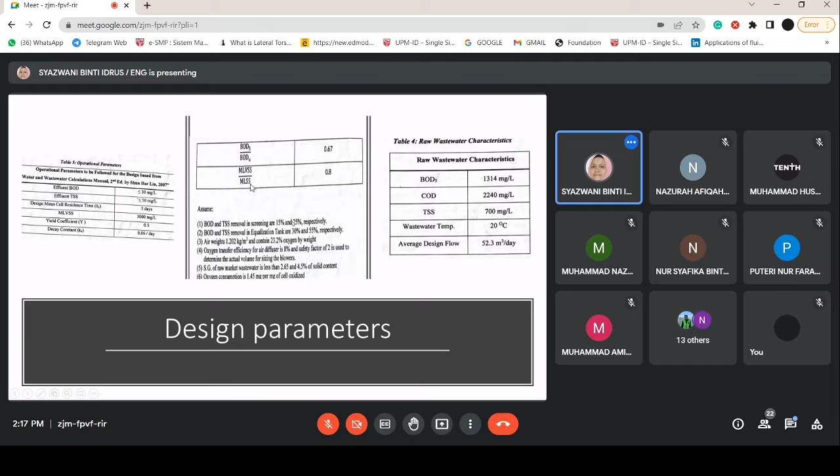Next, in the equalization tank, which is the primary process, we have to moderate or normalize the flow rate based on the cycle.

Since we are designing a wastewater treatment plant for a wet market, this wet market is only operated for 18 hours - it's not like a conventional wastewater treatment system working for 24 hours. If it were 24 hours, you would have the same average flow rate.

In this case, we have to normalize because the operating period is only 18 hours. So these are the actual average hourly flow rates. Since the MBR, the membrane bioreactor, treatment operation takes 12 hours, you take the average hourly flow rate times 12 hours, and you will get the volume of wastewater to be treated.

From the volume of the wastewater to be treated, you can calculate the sizing for the equalization tank. Take the depth equal to 3 meters, the freeboard equal to 0.6 meters. Volume equals length times width times depth. Given that the ratio of length to width is 3 to 1, so L is equal to 3W, times W, times 3. The depth is equal to 3 meters.

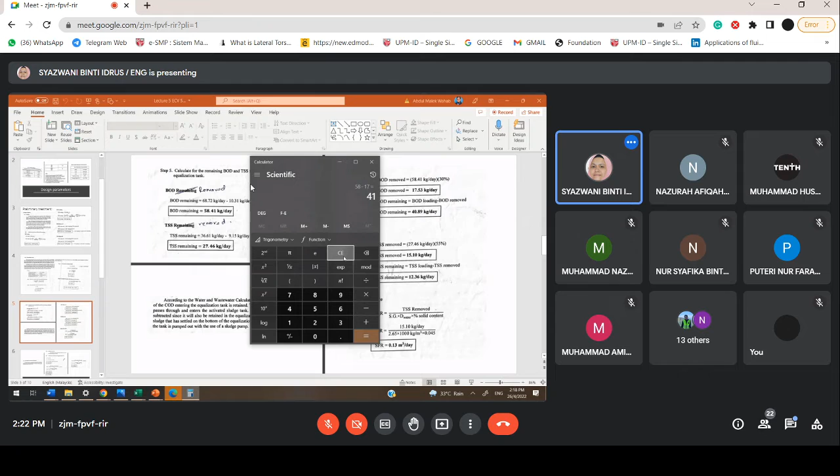So how do you get BOD remaining? 58.41 minus 17.53, so that you get BOD remaining. These are the BOD to be treated during the secondary treatment, because we calculated earlier the amount of BOD to be removed during the primary process. So BOD loading, which is the BOD remaining from the preliminary process, minus the BOD removed during the primary process, gives BOD remaining to be treated in the secondary tank.

The same steps happen for the TSS. Then you can also calculate the sludge flow rate. Normally the value is extremely small, but you consider sludge flow rate equal to TSS removed over specific gravity of the particles. Normally we use the specific gravity of sand, which is 2.65, times 1000, the density of water, times solid content. Solid content was given earlier, so you get SFR equal to 0.13 meter cube per day.

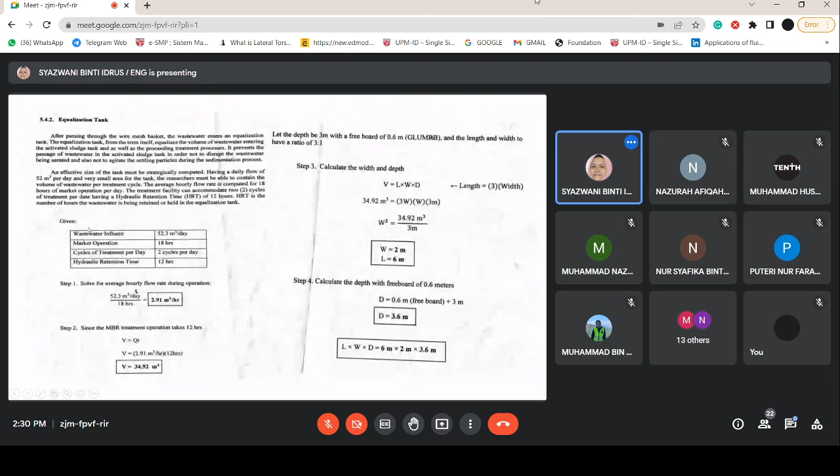So 1 plus KD, 0.006 per day is the KD, given earlier - here, the decay constant. Then theta C, the sludge age, 5 days, is also given. But this is a mistake - it is actually 0.06, not 0.006. But the answer here is correct.

Once you have calculated Y obs, then you can calculate PX. PX is important because later we need to calculate PY. What is PX? I have an extra note here. PX is equal to mass in MLVSS, and PY is the mass of MLSS. Given earlier that the ratio of VSS over SS is equal to 0.8. So to calculate PX, you solve for this equation, and these are the equations to be used. Then you can calculate the oxygen requirement.

The oxygen requirement. Then calculate for the sludge wasting. Sludge wasting - theta C is given in the earlier section as 5 days. You need to find the value of QSW.

The QSW, this equation - if you notice here, 50 milligram per liter times 0.8, where do I get this value? 50 milligram per liter is from the TSS concentration given in the earlier section of the slide, times 0.8. Where do I get 0.8?

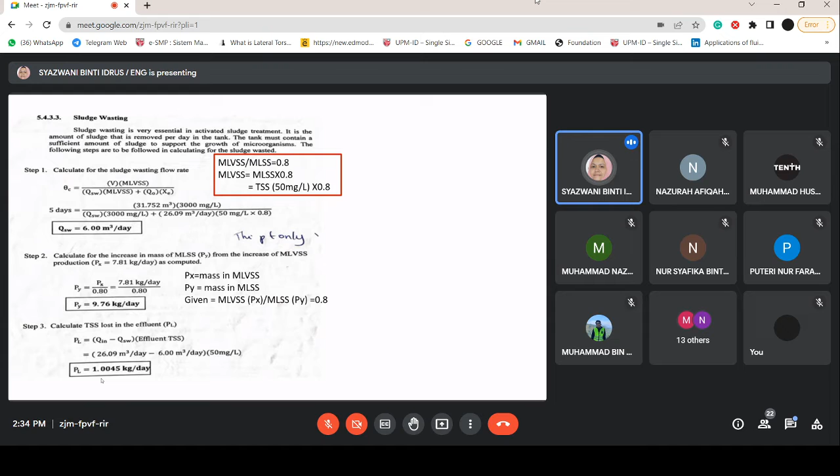If you have a look here, we consider the total Q in, minus the QSW. So these show the importance of calculating the QSW, this is the sludge wasting flow rate. Q in is the actual flow, minus the sludge wasting flow rate, then times with the target concentration of the total suspended solid. So you will get the PL, which is the TSS loss in the effluent. Meaning this will be the concentration of your TSS in the treated wastewater.

The final section is on the membrane bioreactor facilities. These are a ready-made membrane system. We are not yet in the topic of membranes, but this is a small introduction, a simple introduction on a complete membrane system. You can see the design flow is between 10 to 20 liter per hour per meter squared. These are the recommended flow and filtered area.

The pore size is about 0.1 micrometer. The porosity is more than 80%. Considering these are the specs of the membrane, in this case they use the hollow fiber membrane.

Remember, I did mention to you 3 weeks ago, there are many types of membrane, classified based on the pore size. So hollow fiber membrane, flat sheet, or tubular membrane, these are only the configuration, how they arrange the membrane. But the membrane is classified based on their pore size.

For this reason, nanofiltration can also exist as a hollow fiber. Ultrafiltration can also exist as a hollow fiber. Microfiltration can also exist as hollow fiber membrane, because different pore sizes can also be arranged based on the type of membrane. So we do have hollow fiber, flat sheet, as well as tubular membrane, these are the most popular membrane configurations.

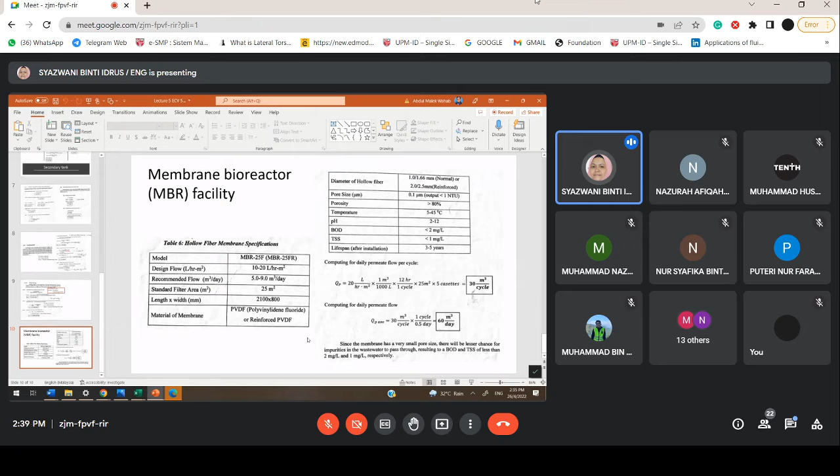Oxygen requirement is no longer part of your syllabus because it has been covered during the 3rd year of study, but you can go through it for revision purposes. Just to be honest with you, it will not come out again in your test or final exam. This topic, oxygen requirement, as well as slide number 8 and slide number 9, will not come out again in your test or final exam because it's no longer part of your syllabus. So the rest of the slides are still covered as part of the syllabus in this course.

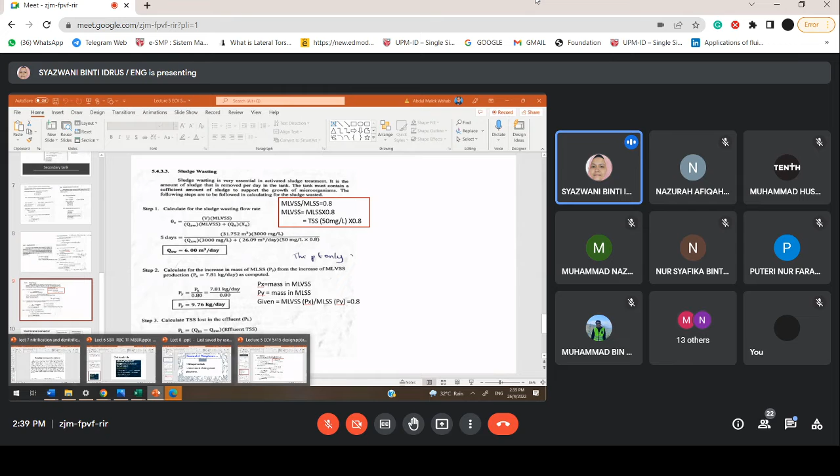All right, next slide is on... no, the sequencing batch reactor. Alright, before we start with the sequencing batch reactor, today we are going to cover four systems: sequencing batch reactor, trickling filters, RBC, and moving bed bioreactor.

Just to recap, we are exploring the aerobic system, of which there are two types: attached growth system or biofilm, and suspended growth. For attached growth, the rule is very easy - as long as you have the filter media, as long as you have the support carrier for the microbes to grow, that is known as the attached growth system. But if you employ a tank or a pond without any support media, with only sludge in the tank, then it is known as suspended growth.

So today we have covered up to the activated sludge process. Now I'm going to complete the sequencing batch reactor, then we shall explore the attached growth system.

Okay, before we go further... oh dear, looks like I have to reopen the slide again.

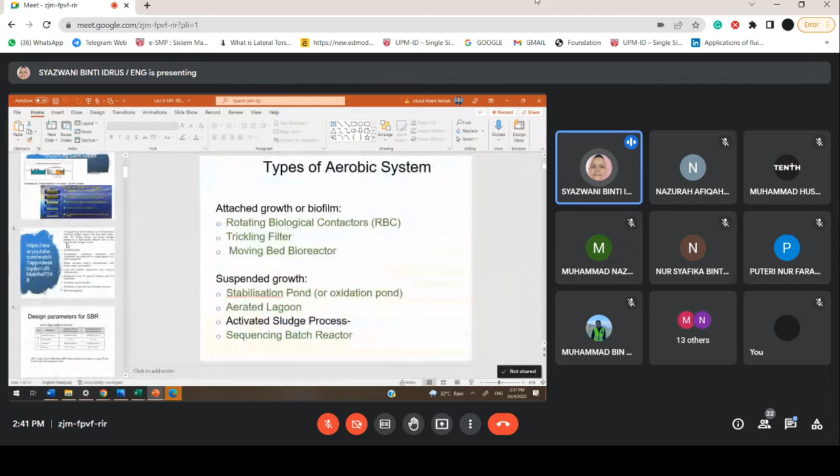Alright, before we go further, I would like to give a very short description on sequencing batch reactor that will be followed by a video. So sequencing batch reactor is a system where we only need one tank to complete the entire process. In other words, sequencing batch reactor has been designed as an improved version of the activated sludge system.

Activated sludge system is a system that requires a larger area, because we need a primary system, an aeration tank, a clarifier, and sludge treatment. So by employing sequencing batch reactor, we can minimize the area required, as well as minimize the sludge production. This system also helps improve or remove the nitrogen as well as phosphorus content.

So it comprises of, definitely, whenever we have a wastewater treatment system, we need a screening process - that is a physical process to remove the larger debris. This will be followed by the equalization tank, the function of which is to control the volume of water into the major tank. So in this tank there will be four processes that occur.

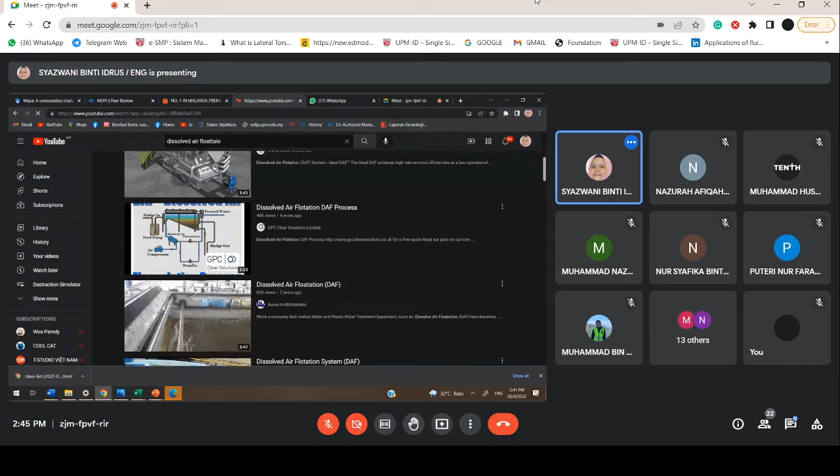Okay, let's watch a video. There is no voice for this video, but you can always read.

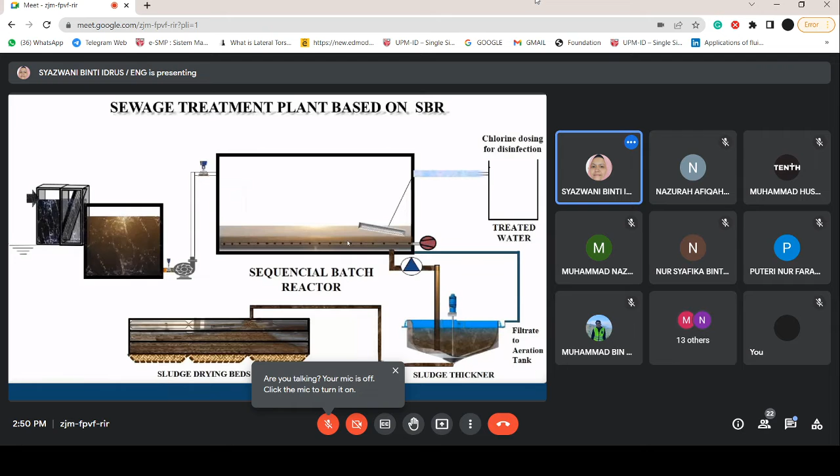Okay, that's one. Next, these are the advantages of having this system. This system is basically a simple process: fill, react, settle, and draw. It comprises equalization, biological treatment, and clarification is achieved - all these processes can be achieved within a single reactor.

We can have better aeration control. We can treat or remove nitrogen - denitrification, the nitrogen removal, and lower power consumption too. Denitrification is the process that occurs in any water bodies for nitrogen removal. After the semester break, we will go through these topics on denitrification as well as nitrification process.

Biological nitrogen and phosphorus removal without need for chemicals - so these systems are good for N and P removal. It's simple in terms of operation, and minimal footprints. These are the major advantages as compared to the conventional activated sludge system.

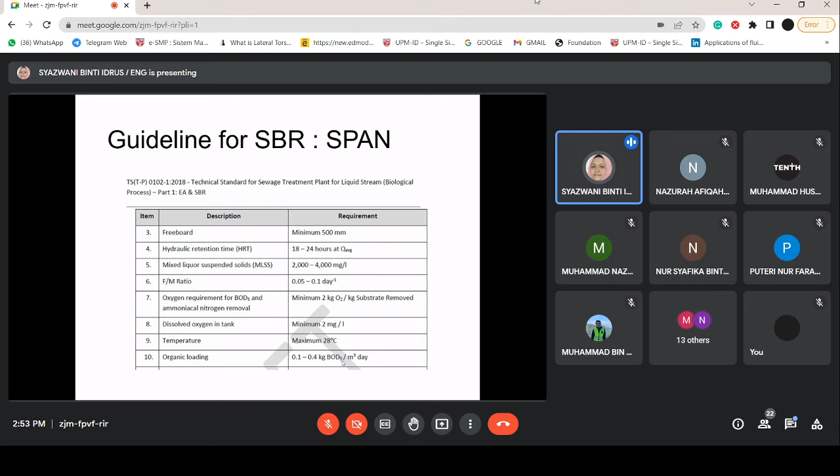Okay, next we continue with the RBC - this is the rotating biological contactor. Maybe we can go for the calculation of OLR first. What is OLR?

By definition, OLR is the organic loading rate - the weight of the waste given to a certain volume of the tank or reactor. The organic loading is the amount of COD or BOD applied to the filter or reactor per volume of filter media or reactor per day. The unit is expressed as BOD gram, not gram per liter - it has to be gram. The weight of the BOD, the weight of the COD per meter cube, where meter cube is the size or volume of the reactor, and per day.

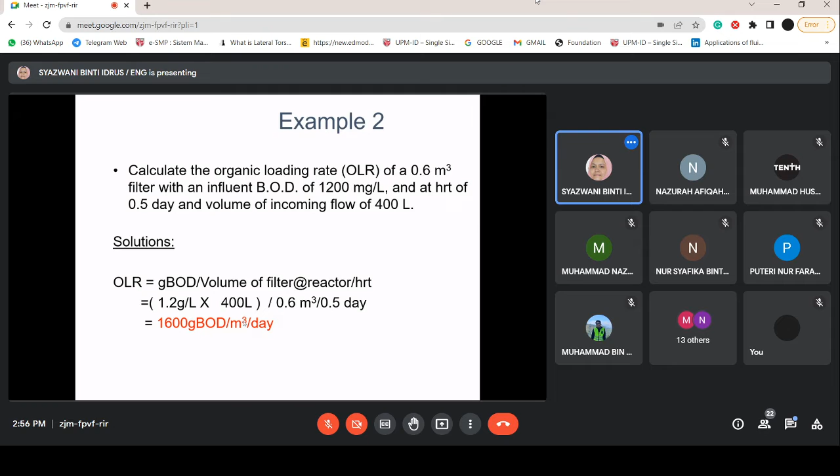Meaning to say that every meter cube of the reactor, you give them about 1600 gram of the BOD. So this is how we define the organic loading rate.

Okay, let's go for a very short introduction on the rotating biological contactors. In the previous year, you have studied the theoretical aspects of the RBC, but you did not conduct any design calculation. You did calculate for the area required, but there is no detailed calculation on the stages as well as the train for the RBC. So a very short description: the RBC is a fixed film biological secondary treatment device.

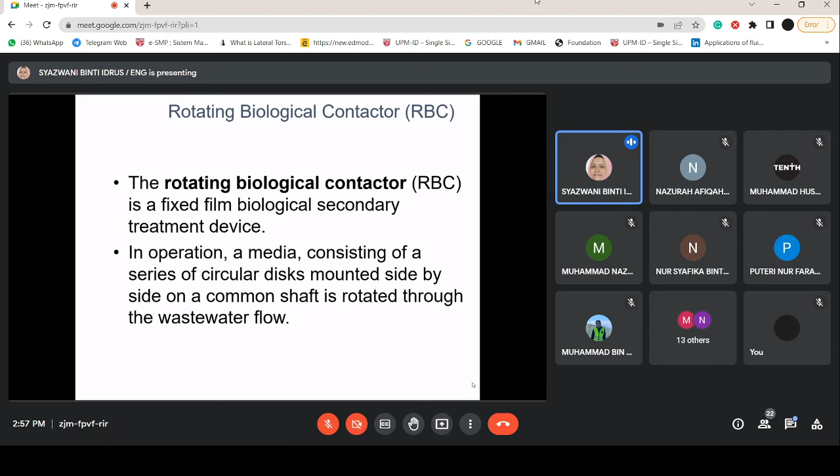The concept of RBC is a rotating drum with a filter media so that microbes can stay within the media. It will rotate to get in contact with the wastewater.

Okay, so let's watch this. This is a very short video. What is RBC?

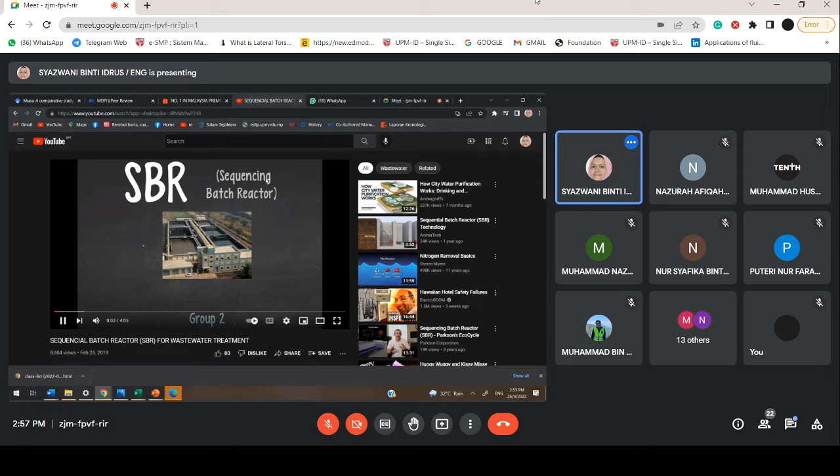Sorry. Why is it still on? One second, let me copy this. Okay. They're getting excited knowing that we are coming. They're running here, look at that.

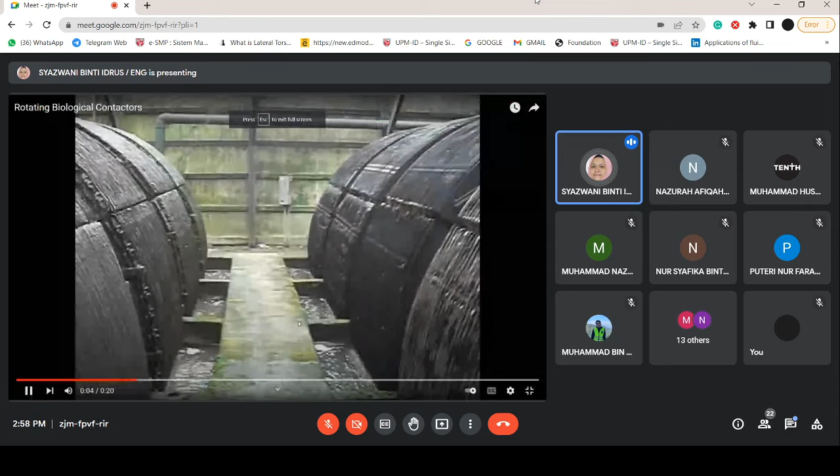Okay, so these are the RBC, rotating biological contactors. Okay, these are the drum. Within this media are microbes, microorganisms which have been cultured. At the bottom part of the system are the wastewater to be treated.

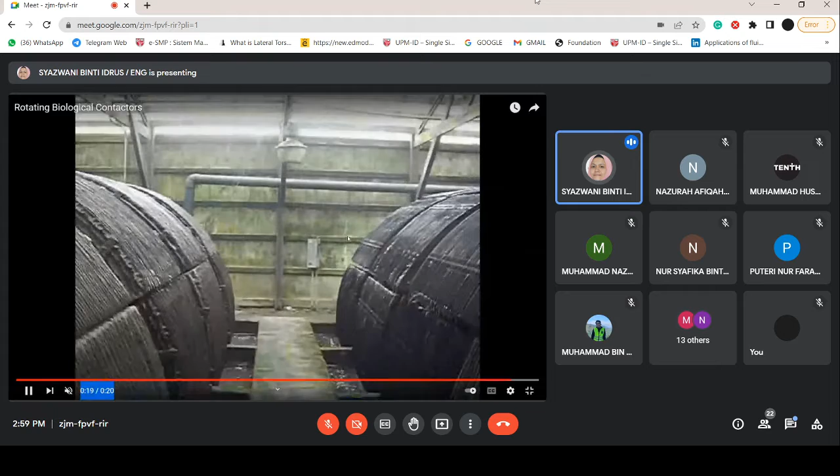Very short video, these are the wastewater to be treated. So the RBC will be rotating, so that it can get in contact with the wastewater and treat it. Where is actually the microbes? Microbe is here, staying within the filter media. So the concept of RBC is the filter media will rotate so that it can get in contact with the wastewater at the bottom part of the tank.

Okay, so this system again is an aerobic system because it's an open system where we allow the oxygen to get in contact with the microorganism. Yeah, this is still an aerobic system. Okay, so let's continue.

Okay, normally when we employ RBC, the shaft continually rotates at 1 to 2 RPM, very slow, and a layer of biological growth 2 to 4 mm thick is soon established. Once you keep rotating the drum, it will get in contact - the microbes will get in contact within the filter media, continuously biodegrading the waste, and after a certain period it will develop a layer of slime on the filter media.

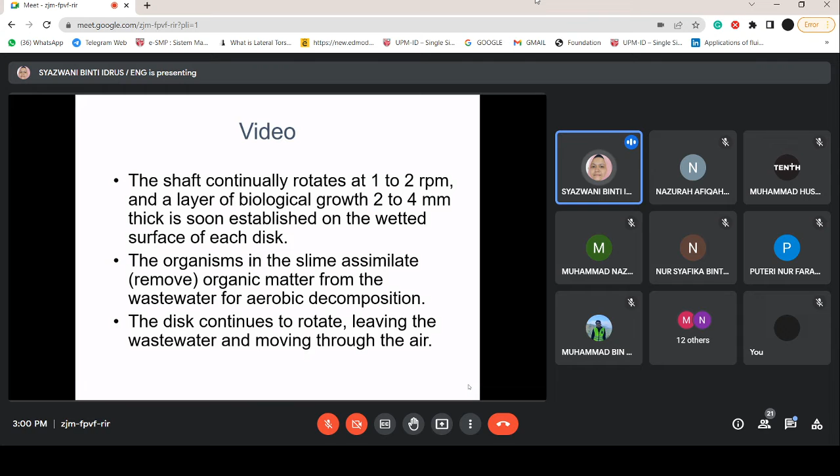And this slime is extremely important because when the slime exists, it indicates the process occurs. It shows the performance of the process. After a certain period, the slime will get thickened, so it will be removed from the filter media. Sometimes it requires manual cleaning. But the slime is very important - it has to exist, otherwise no biological process occurs.

Later I will share with you how the colors of the slime tell us the process performance of the system. So these are the schematic diagram on the RBC. Basically, we still need the primary tank, but there will be a series of drums here, and these are the secondary tank. Typically a single contactor is not sufficient.

Typically a single contactor definitely is not sufficient. We will need at least three stages or three trains to complete the entire process, because this is where we keep recycling the...

My son is also doing his reading. Okay, all right.

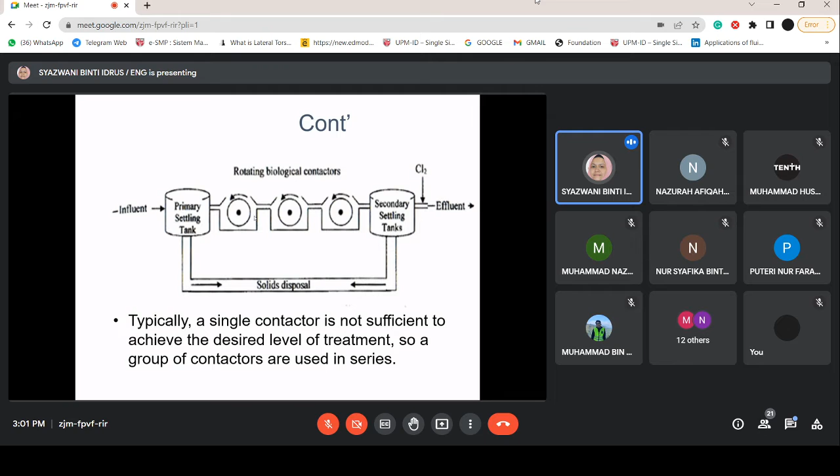Typically it requires a series of drums, so that the wastewater can get better contact with the microorganism. Each individual contactor is called a stage, and the group is known as a train. Later, when we do the calculation, I will share with you what is the train and what is the stage. So most of the RBC consists of two or more trains and at least three or more stages.

Yes, at least there will be two in a row or two in a column, but most of the time in the design, we put three in a row and three in a column. So this is what it means by stages and trains, as I mentioned just now.

Different colors of the slime indicate different process performance of the RBC. If you have a gray, shaggy slime growth, that indicates normal operation. However, if you see reddish brown, golden shaggy growth of the slime, that indicates a heavy, serious problem of nitrification, which means higher nitrogen content in the wastewater being treated, or we have to supply more oxygen in this case.

When we have high concentration of nitrogen in the raw wastewater to be treated, sometimes we have to supply more oxygen, because to treat carbonaceous BOD requires only one group of oxygen, but to treat nitrogenous BOD requires four times the oxygen. So if the reddish brown or golden shaggy growth appears, that indicates higher nitrification process and higher nitrogen content. It tells us that the oxygen is not sufficient for the microbes to biodegrade the waste, due to the high concentration of nitrogen.

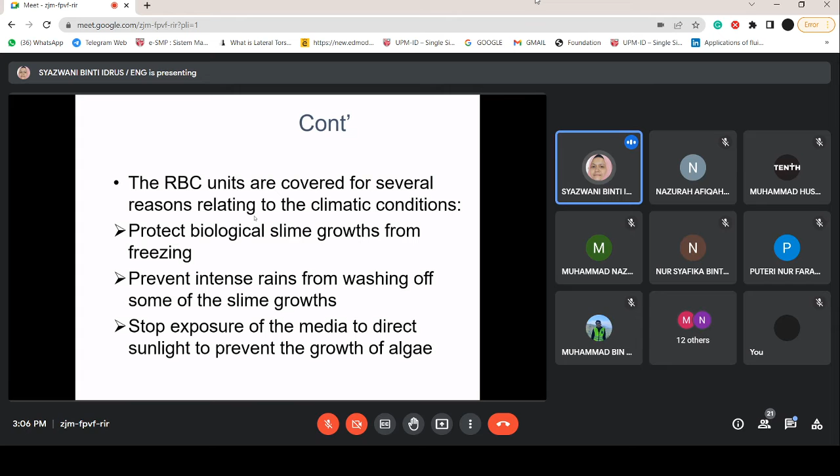Second, we have to protect the RBC unit, the drum, from heavy rain. Third, to protect from direct sunlight, because direct sunlight can cause the growth of algae. Next, to avoid exposure of the media to sunlight, because the media itself can turn brittle, become hard.

So that's why we'd like to avoid direct sunlight and provide protection for the operators - that's why it's better for RBC units to be covered. Now, in regard to typical performance, normally when we employ RBC, we can remove BOD up to 80 to 95%, as well as solids at 85 to 95%. This process is also good for the removal of organic nitrogen as well as ammonia nitrogen.

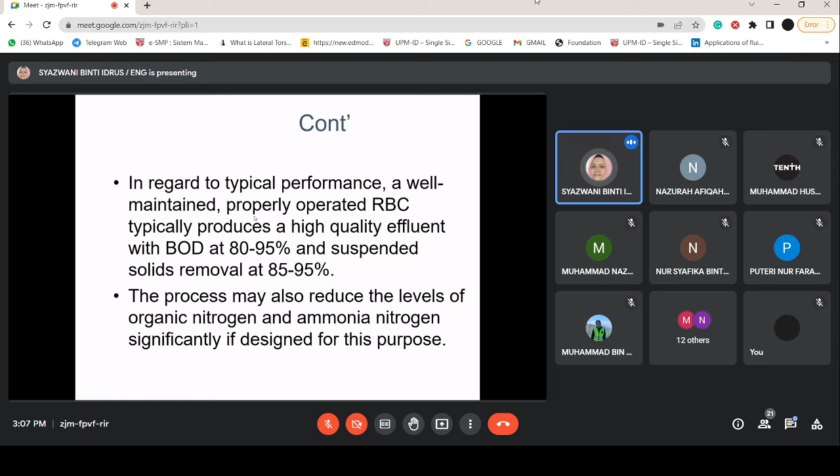If we talk about the sequencing batch reactor we studied earlier, it's good for removal of nitrogen and phosphorus, while RBC is good for nitrogen as well as ammonia nitrogen. Phosphorus - not so many biological systems can remove phosphorus effectively, unless you combine anoxic condition, oxic condition, and anaerobic condition. If you employ only one simple treatment method like this, which is aerobic, it's not easy to simply remove the phosphorus.

That's why in some cases chemicals will be added. What we studied before - they add what? They add ferric chloride for the removal of phosphorus. Then, advantages offered by the RBC: the first one is short contact period.

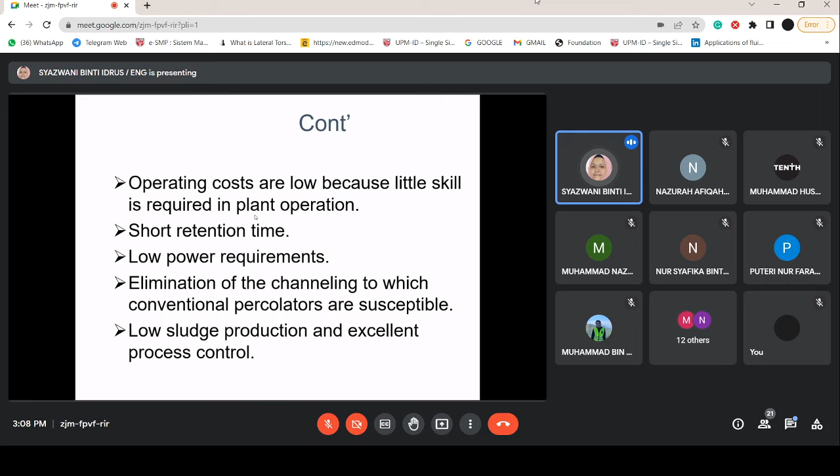RBC are capable of handling a wide range of flows, and sloughed biomass generally has good settling characteristics. Operating costs are fairly low, because little skill is required, short retention time, low power requirement, and low sludge production. So these are the major advantages as compared to the conventional activated sludge system.

The disadvantages of the RBC are the requirement for covering the unit in northern climates to avoid freezing, and shaft bearing and mechanical drive issues, because it requires rotating equipment. That's why we have to monitor to avoid any mechanical problems, so it requires frequent maintenance.

Okay, next is on trickling filters. What is the difference between RBC and the trickling filters?

Both of these systems are attached growth systems, where the principle is employing a filter media, and microbes will stay within the filter media. But the major difference between RBC and trickling filters is that in RBC, the rotating disc will rotate so that it can get in contact with the wastewater at the bottom part of the system. However, in trickling filters, there is a rotating arm which keeps moving so that it will splash the wastewater onto the filter media. So in this case, the wastewater is moving onto the filter media.

Employing this system, normally trickling filters only use one set of system. It's not like RBC just now, where there will be series of trains and series of stages. But for trickling filters, only one set of system. For this reason, in a trickling filter system, normally we have to employ recirculation. The wastewater which has passed through the filter media will come back, will be recirculated for a better removal rate.

The trickling filters consist of major components including the spray head, the media, and the influent. The system is more simple as compared to the RBC, but to get a better removal rate, you have to employ recirculation, meaning that the effluent produced at the bottom part of the system after passing through the media will be recycled again as the influent.

Because if only one run, then you cannot achieve the target effluent concentration. Because the period of contact with the filter media, the contact time between the microbes and the wastewater is too short. That's why it cannot meet with the effluent requirement.

The organisms aerobically decompose the solids, producing more organisms and stable end products. So again, in this system, it will also produce a layer of slime. We can monitor the performance by monitoring the color of the slime.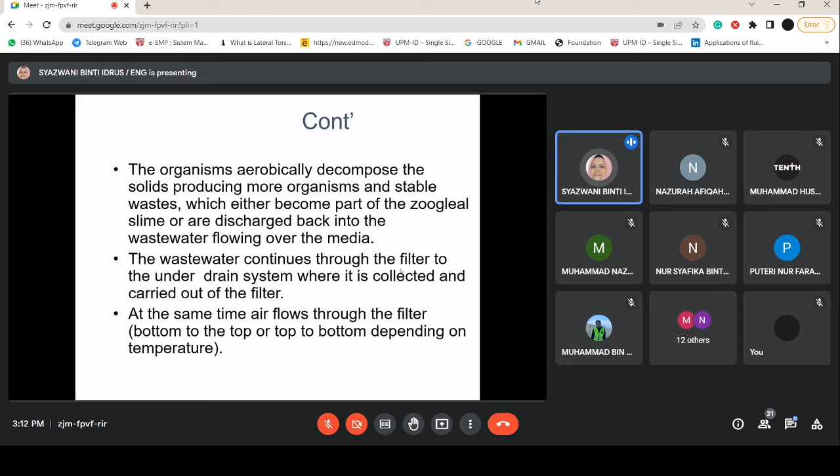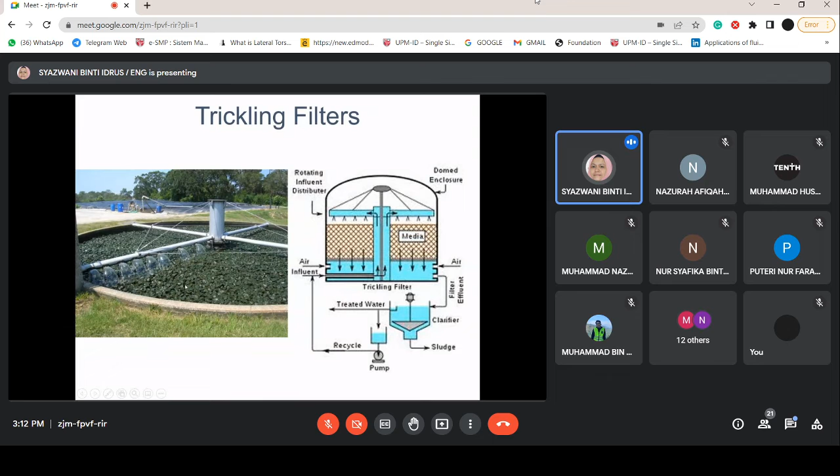On top of that, employing the trickling filters also requires some air flow. You have to supply extra air from the bottom to the top or top to the bottom, depending on the temperature. Otherwise, if we only depend on natural aeration, sometimes it's not sufficient, the oxygen is not sufficient for microbes to do their work. So it ends up, this system is more risky as compared to RBC. Sometimes it can end up having the problem of bad odors.

Oxygen is transferred from the air to the wastewater and slime to maintain the aerobic condition. So likewise the RBC, here we have to periodically remove the slime.

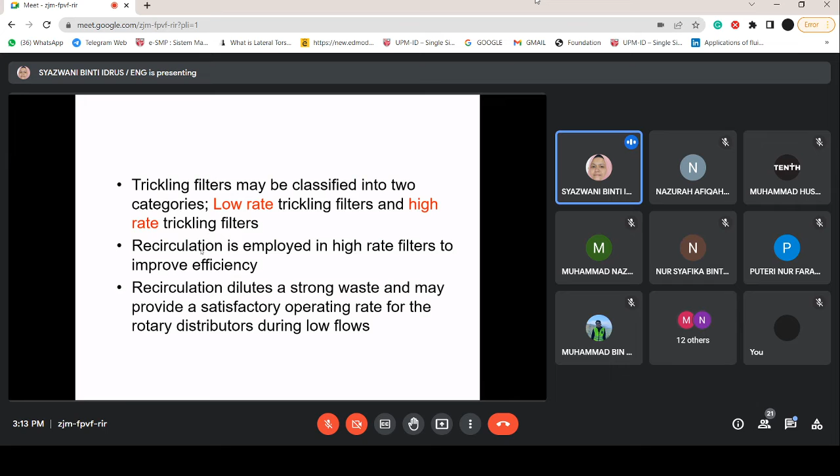Trickling filters may be classified into two types: the first one is low rate, the second one is high rate. For high rate trickling filters, they will employ recirculation. As I mentioned, it's required to employ recirculation, because by recirculating the waste, we can dilute the strong waste, which can improve the removal efficiency.

For the process design of trickling filters, the BOD recommended for low rate is 0.11 to 0.35, and the high rate is about 0.37 to 1.85. The depth for the low rate, without recirculation, when we mention low rate it is a system without recirculation, the depth is about 1.8 to 3.0. So the depth of the filter media, in other words for the system without recirculation, is normally deeper.

While with the system with recirculation, the depth is around 0.9 to 2.4 only. So the problem with the low rate system is many flies and chances of odor. But when you employ higher rate filter with recirculation, this problem can be reduced, it can be improved in terms of less odors and flies.

If you supply less oxygen, if they don't receive sufficient oxygen, microbes will die. That is the reason why it will smell very badly, the system will smell very badly because no biological reaction occurs.

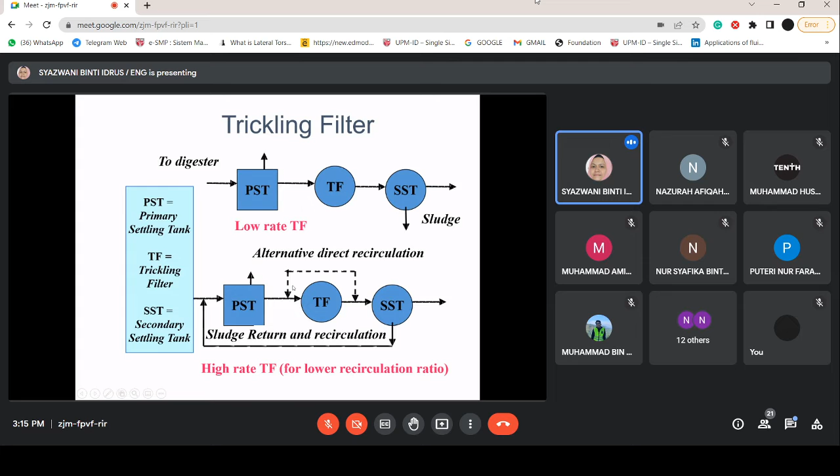So the advantages of employing trickling filters: it's very efficient for the removal of BOD and ammonia. Just now RBC is for ammonia and nitrogen. It uses a minimal amount of power. Disadvantages: power breakdown can cause the gravel bed to dry, bacteria die, and smelly conditions.

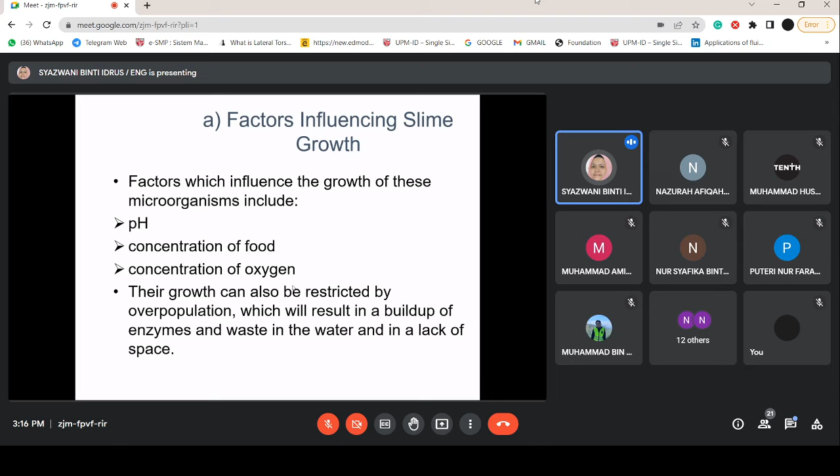So these are the major disadvantages of employing trickling filters. Apart from monitoring the colors of the slime, we can also monitor the pH, the concentration of the waste, and the concentration of oxygen, because these are the common parameters to be monitored whenever you run a biological system.

So the expected pH is around 7 for BOD removal conditions. For ammonia, sometimes the pH is higher, about 8. So whenever you have a high concentration of protein in your sample, definitely you will get higher pH, because higher protein concentration can cause higher ammonia production, thus increasing the pH value.

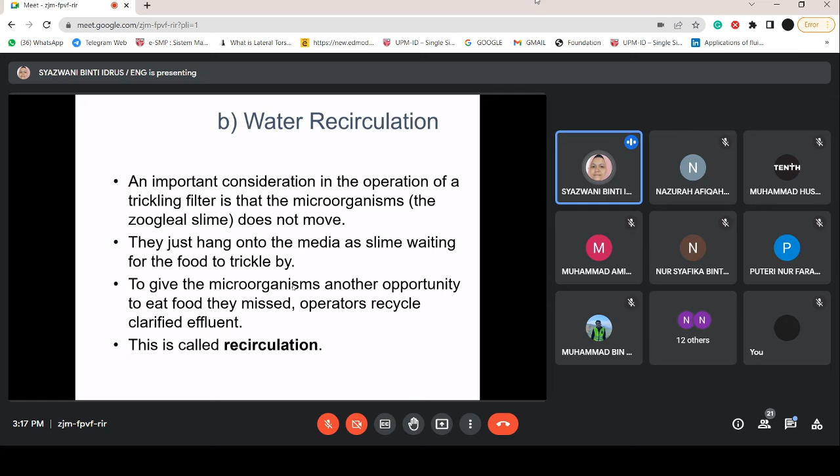Recirculation in a trickling filter is a system where we recirculate the effluent. We recirculate the effluent to reduce the organic loading, to improve the sloughing, to reduce the odors, and to reduce or eliminate filter ponding problems. We would like to promote more activity.

That's why we employ recirculation in a trickling filter system. On top of that, trickling filters normally exist as one single unit, not in a series or train or drum like RBC. That's why it's good to apply recirculation.

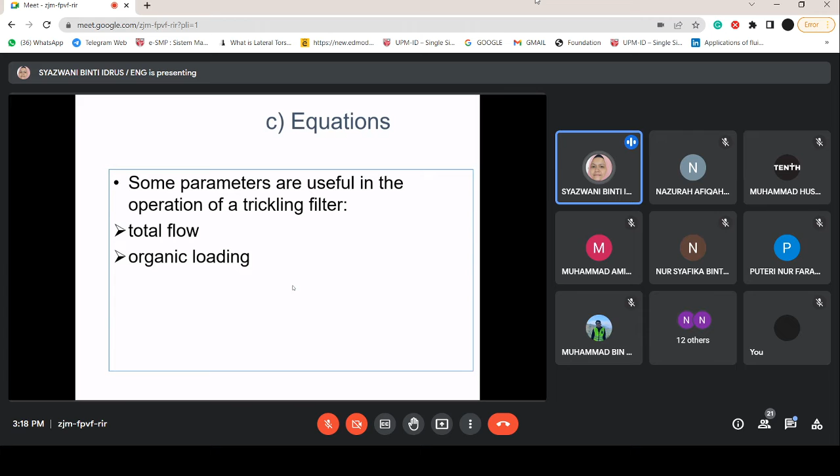So in this example, we have two examples: first, to calculate the total flow, second, to calculate the organic loading. I've shared with you the example of organic loading. Now let's see the total flow. There are two examples here. First, I would like to share how the recirculation rate can influence the total flow.

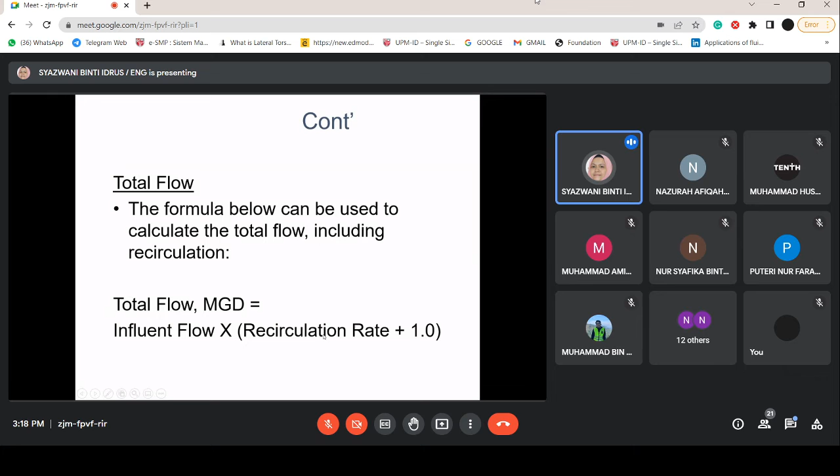For example, the formula below can be used: inflow times recirculation rate plus 1. So case 1: the trickling filter is currently operating with a recirculation rate of 1.5. Calculate the total flow when the influent is equal to 4.25 megagallons per day.

In the second case, the inflow is 72 mgd, but the recirculation is only 0.009. I would like you to see the difference, to compare in terms of the answer. You can see here, when you solve the equation for case 1 to calculate the total flow, with a recirculation of 1.5, the actual flow is 4.25.

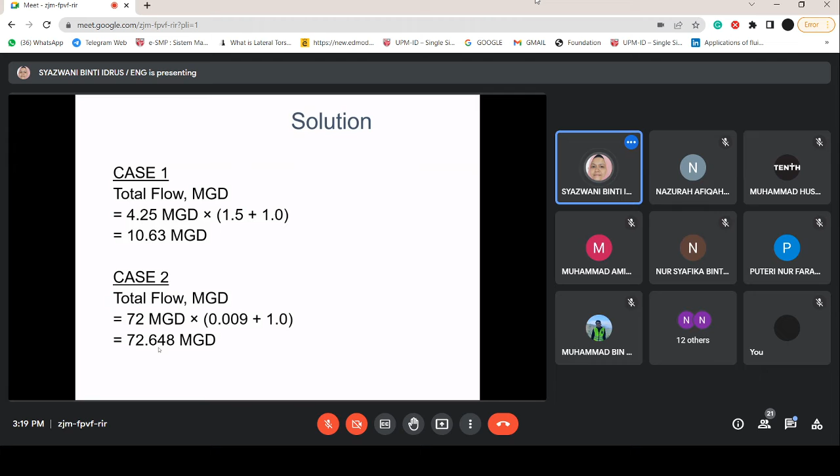When you employ recirculation, the total flow becomes 10.63. But in case 2, the total flow is 72 mgd, and since the recirculation is very small, there is not much difference between the original flow and the total flow. So these are the major differences whenever we employ recirculation.

Okay, so I think that's all for today, but we still have the MBBR. Let's watch a short video on the MBBR, and after this we can continue with the calculation on how to design the system.

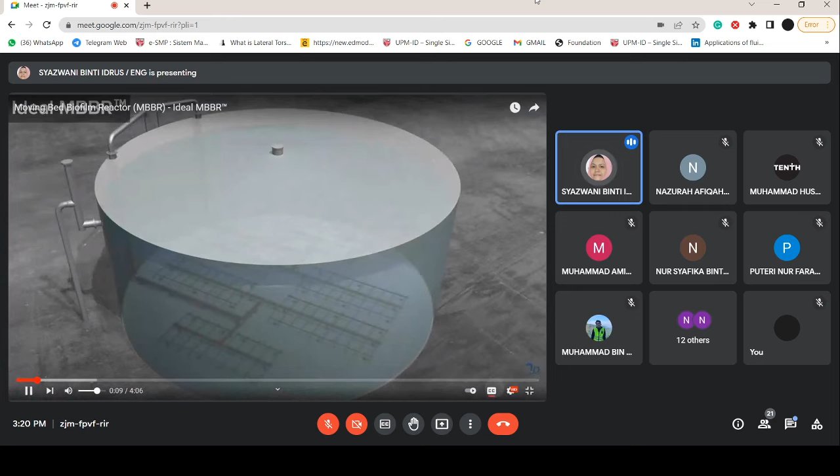The ideal MBBR is a state-of-the-art fixed film biological process used in municipal and industrial wastewater treatment for BOD and COD removal, as well as nitrification and denitrification. One concept of applying the moving bed biofilm reactor, or MBBR process, is for industrial pretreatment, which shaves off 60 to 80% of the influent BOD, while lowering the loads heading to publicly owned treatment works, or POTWs. The MBBR process is a 100% flow-through process, meaning the flow rate of the reactor effluent is the same as the influent coming into the reactor.

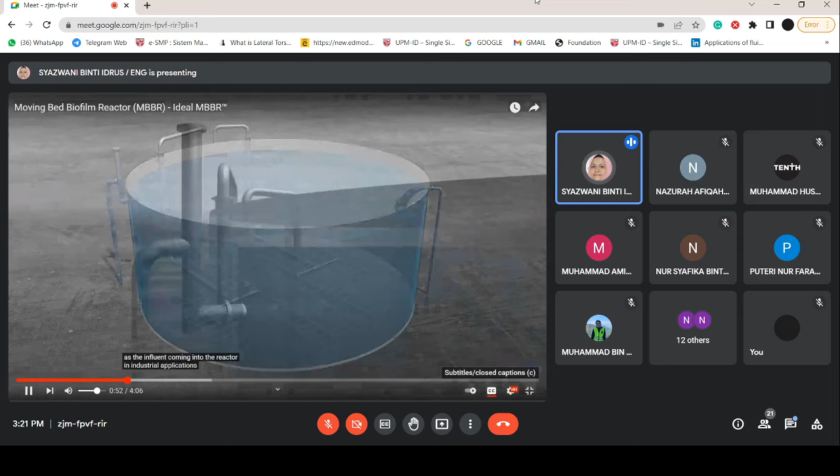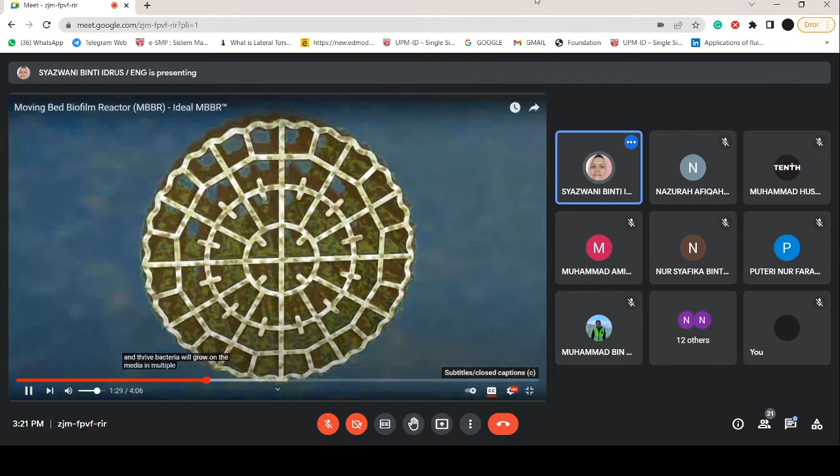In industrial applications, the water level, or side water depth, is maintained by the gooseneck effluent piping on the outside of the tank. This allows the reactor to reach its maximum retention time, and for complete submergence of the media retention screen. The inside of the reactor has no moving parts that require maintenance. Each reactor has specially designed, submerged, freely moving biomedia, providing abundant surface for bacteria, or biofilm, to grow and thrive. Bacteria grow on the media in multiple layers, allowing the MBBR to be very robust and self-regulating.

If an event were to occur, such as a giant pH swing, the media will not lose all of the layers of the bacteria, giving the MBBR the opportunity to recover much quicker than other processes. The bacteria digests the organics in the waste stream and converts the soluble material into biomass, which will be removed downstream by a solid separation system.

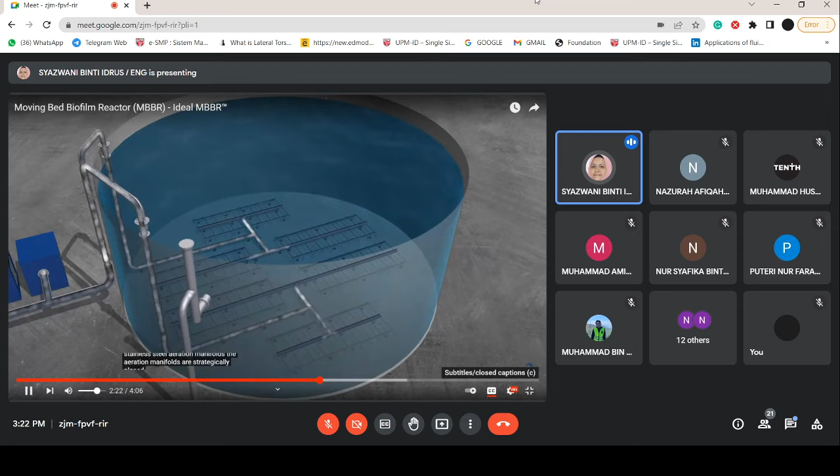An MBBR for BOD and/or COD removal or nitrification is an aerobic system, meaning oxygen is introduced into the reactor to allow bacteria growth. Oxygen is brought into the tank by having blowers send air through stainless steel aeration manifolds. The aeration manifolds are strategically placed inside the tank to have even coverage throughout the entire volume of the reactor, and to provide the necessary mixing for maximum treatment during the reactor's retention time.

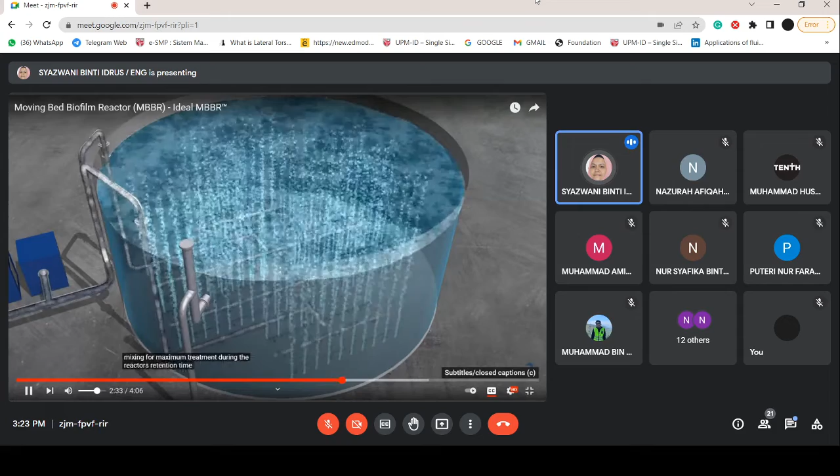Stainless steel media retention screens are placed on the effluent flange, as well as the overflow and drain flange, to prevent the media from escaping the reactor. The continuous movement created by the media in the tank scours the screen and minimizes any deposition of solids which could create any head loss.

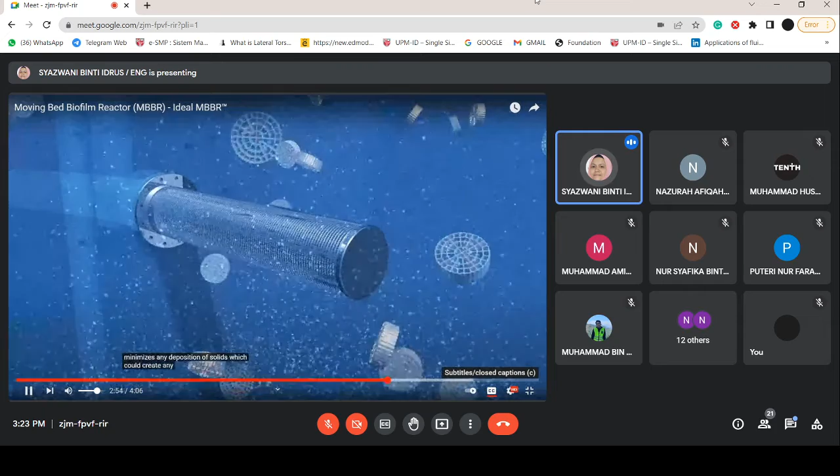Even though the MBBR is robust and can handle many load variations, there can be times, especially in industrial applications, where additional nutrients will need to be supplied. In those cases, an ammonia or phosphorus source may be needed to maintain the proper ratio for the bacteria to thrive and remove the desired amount of soluble organics. Anti-foam may also be needed if the waste stream tends to produce foam.

The World Waterworks ideal MBBR process provides the smallest footprint biological system. For industrial clients, World Waterworks specializes in cost-effective pre-treatment systems, such as combining the MBBR with its own ideal DAF system. The design is simple to operate, at a low capital cost, all while staying tolerant of both load swings and temporary load deprivation.

Okay. So these are the moving bed bioreactor system.

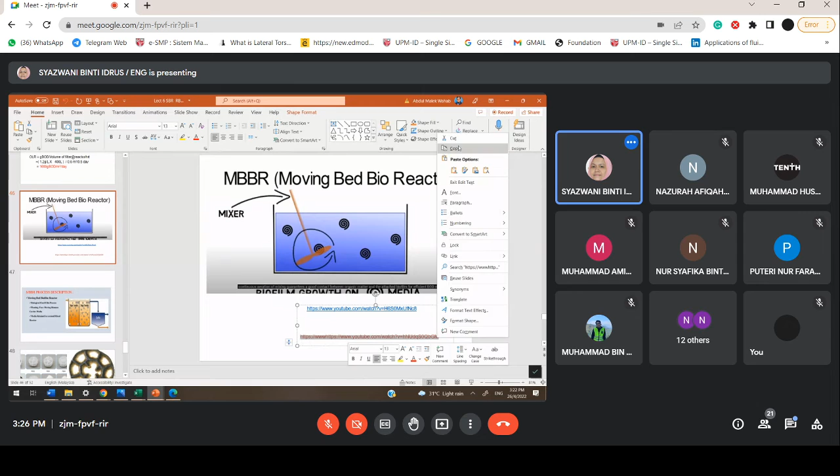We can watch another video. Oh, the video is no longer available. Okay, the video is no longer available.

Alright, then we shall continue with the MBBR system. So basically these are the process of a fixed film process, an attached growth process, where the filter media is floating and free to move within the tank.

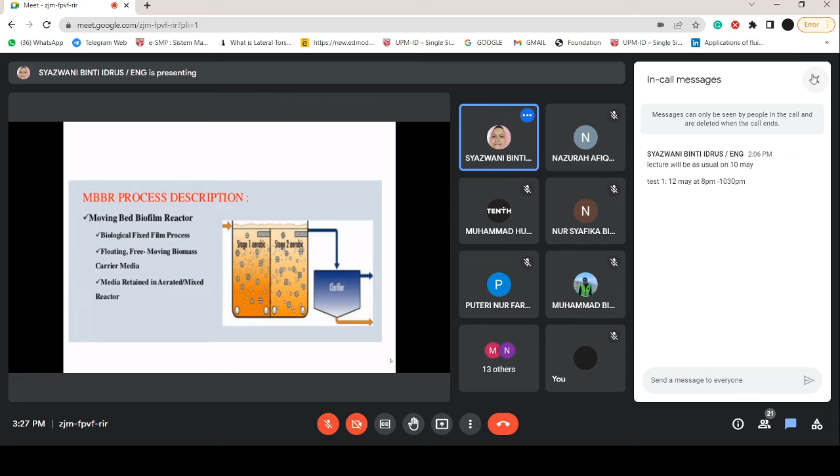So these are the actual photo of the media. Let's say we have this. They are made of plastic. The diameter of this media is about 1 centimeter, very small.

So these are the photo of the filter media after a few months of operation. You can see the microbes get attached to the media, so that they stay within the media. This is what we want. This is what we call biofilm, a layer of biofilm, the proof of having the microorganisms within the media.

So we provide a house, a good space, a small space for the microbes so that they will feel secure to stay within the media. So this is actually the spirit of having the filtration filter system, but employing the MBBR will promote more contact between the wastewater, the microbes, and also the oxygen.

So these are the actual flow diagram of the MBBR. Still, we have to use the screening process, the grit removal process. But employing this system, we can combine the aeration tank with the primary tank, and this is the secondary clarifier. We'll need a sludge treatment. So how does the system work? The pieces of the biofilm will provide a better solution for removing waste in the water.

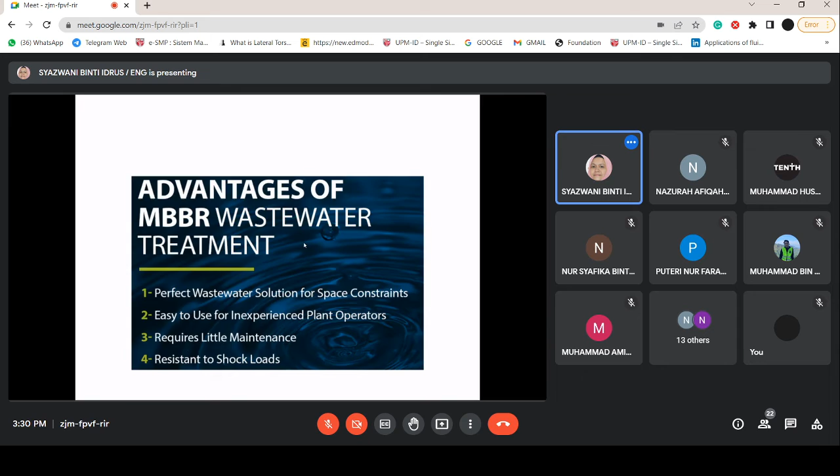Alright, okay, so we have one more calculation. We have two more calculations to cover today.

All right, this also is a revision. We have covered this during the environmental engineering subject, but the reason why I included it here is because you need to use this calculation in your project.

Compare the area requirement for conventional trickling filters with loading of 0.1 kg BOD per meter cube day and conventional activated sludge with loading of 0.56 kg BOD per meter cube day.

So in this case, we are comparing the area required based on different loading rates. In this question, you need to design for the trickling filters, as well as find the area required for the trickling filters and the area required for the aeration tank in the conventional activated sludge process. So you are given the information.

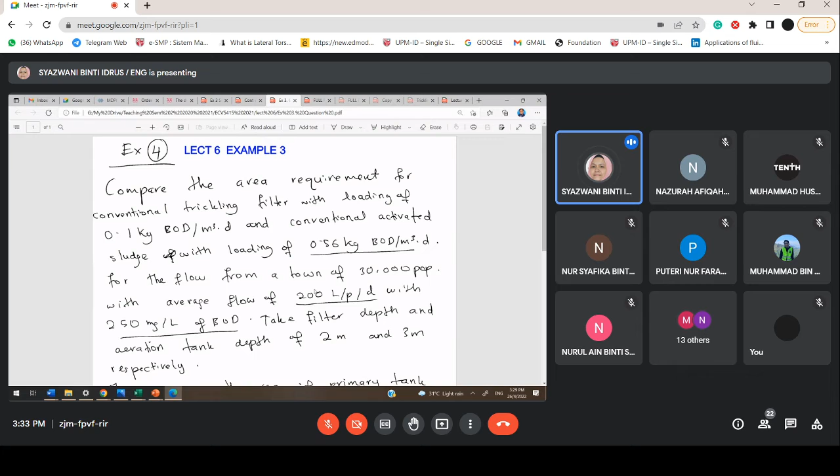Take filter depth and aeration tank depth as 2 meters and 3 meters. This is the filter depth for the trickling filters, which is 2 meters, and 3 meters is the depth for the aeration tank. After you have completed this and calculated the area required, then consider the area required if the primary tank has removed 30% of the BOD.

All right, first, how to solve this question? You have to calculate the flow rate. How to calculate the flow rate? You are given the population as well as the average flow, just multiply them. So you will get about this value.

Then you calculate the BOD mass. BOD mass is equal to BOD times Q. So BOD concentration is given as 250 milligram per liter times Q calculated earlier. So you will get BOD mass equal to 1,500 kg per day. This is for the trickling filters.

Then you can calculate for the volume. BOD mass is given as 1,500 kg per day, BOD loading is given in the question, so that you will get the volume, which is 15,000 meter cube. To get the area, volume equals A times D. D is given as 2, so the area required for the trickling filters is 7,500 meters squared.

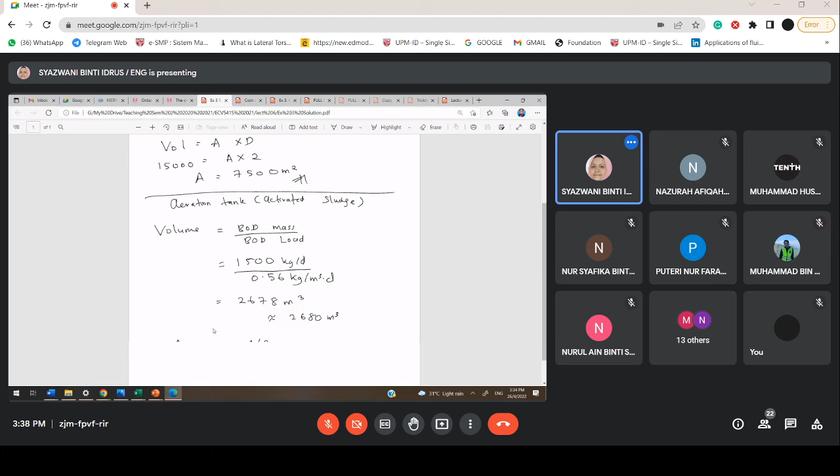Alright, so these are the examples. Do you have any question for this calculation? Any questions? No, doctor. Okay, great.

You need this, it's already covered in previous years, but you need to use this calculation later to complete your project. You have only one project for this course. I will pass you the project after test one.

Okay, next is the calculation to calculate the design for the trickling filters as well as the RBC.

Okay, these are trickling filter loading. A 10 meters diameter single stage trickling filter contains conventional cross flow plastic packing at a depth of 6.1 meters. This example is not too long.

The solution is not too long, but the problem is you have to refer to a few tables before you can complete, before you can solve this equation. But the steps are not many. Okay, you can read the question first.

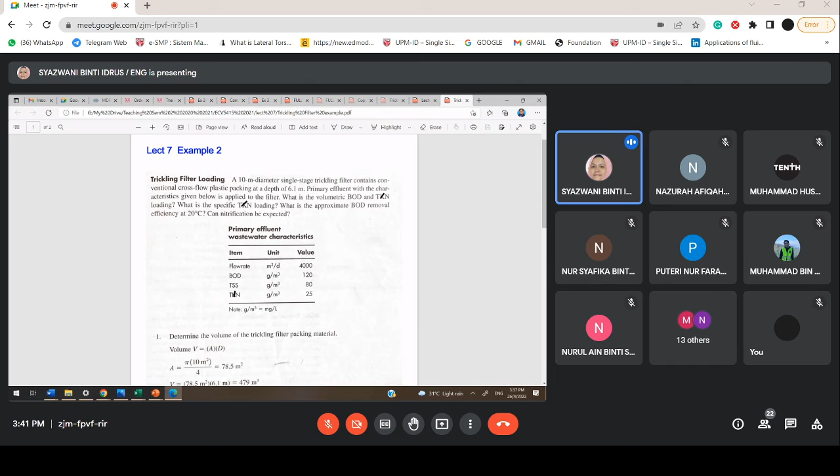You are given in this table the characteristics of the wastewater. The flow rate is 4,000. The BOD is 120. The TSS is 80. The total nitrogen is 25. All of them are in the unit of gram per meter cube, which is also milligram per liter, except the flow rate.

First, determine the volume of the trickling filter packing material. Volume equals A times D. Everyone knows this, so A, since this is a circle, you use the formula for a circle to calculate the area. D is 10 meters squared, given in the question, divided by 4 is part of the equation, so you get area equal to 78.5 meters squared. So the volume is 78 times 6.1, and 6.1 is given.

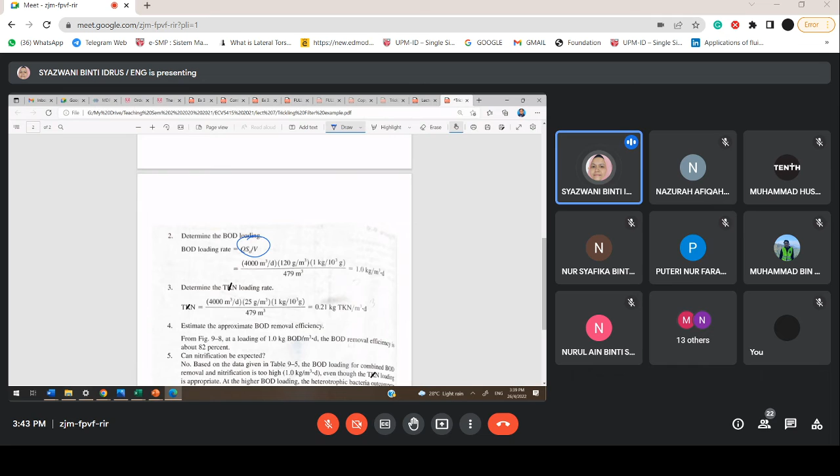Now you can get the volume. Next step is to calculate the BOD loading, which equals Q times S naught over V. You need to calculate the BOD loading as well as the total nitrogen loading. So for the BOD loading, Q is equal to 4,000, as given.

120 is given in the question. That's the S naught. S naught is the BOD, as already mentioned. The BOD can also sometimes be represented by S naught.

And 1 kg, this is only the unit conversion. And 479 meter cube is the volume. If you solve this equation, you will get 1 kg per meter cube day.

Next, you have to determine the total nitrogen loading rate. You still use more or less the same formula, but you have to change the S naught. Just now, when you calculated for the BOD, you used 120. Now, when you calculate for the nitrogen, you have to use 25. So here is 25, and after unit conversion, you get 0.21.

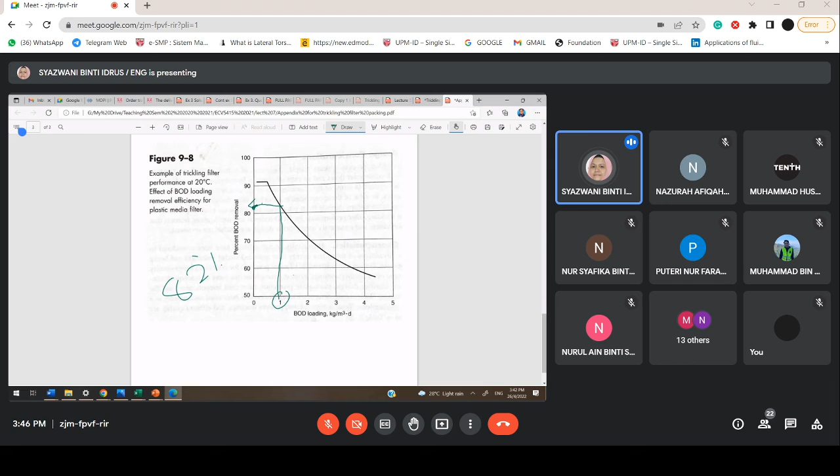In this case, the BOD loading is equal to 1. So you draw a vertical line and a horizontal line, so that you get the BOD efficiency. The percentage of BOD removal is around 82%. That is how we find the BOD removal efficiency.

So you have to calculate BOD loading, and you have to make sure you get a correct value. A wrong value of the BOD loading will give you a wrong value for question number 4, which is the BOD removal efficiency.

Question number 5: can nitrification be expected? How do we know if nitrification can be expected or not? First, you need to know what nitrification is. Nitrification is the process of conversion of organic matter into nitrate - the process of adding nitrogen into water or wastewater bodies. If this process keeps continuing, it will end up with a higher concentration of nitrogen.

So normally, whenever nitrification occurs, it has to be completed with another process known as denitrification. Denitrification is the process of removal of nitrogen, from nitrate to nitrogen gas. We shall discuss this in detail after the semester break - what is nitrification and denitrification.

Okay, so let's see from this condition whether nitrification can be expected or not. The answer is no. But how do we know whether it's yes or no? This can only be determined from the value - definitely it has to be determined from the value.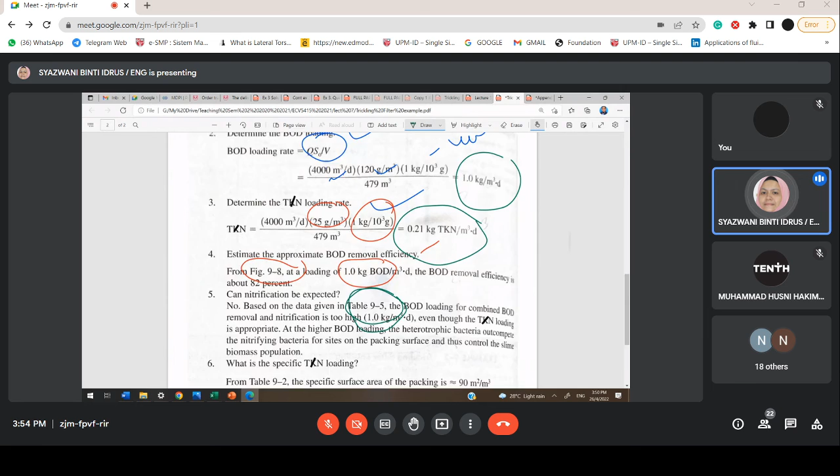So if we compare the carbon to nitrogen ratio, it's clearly, even before we check the table, we know that at this ratio, nitrification cannot be expected, because the BOD is too high as compared to the total nitrogen. Okay, number 6, what is the specific total nitrogen loading?

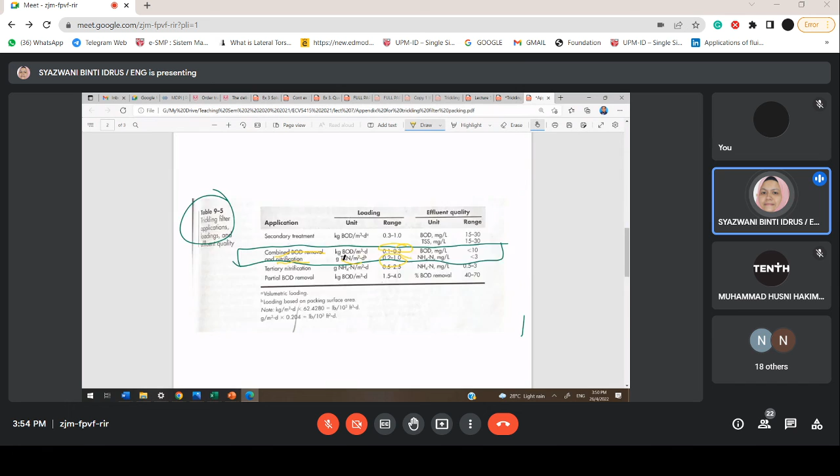In this case, you have to refer to Table 9.2. Where is Table 9.2? Table 9.2 is here. Let's choose pink in color for 9.2. This is on physical properties of trickling filter media. Okay, let's study one by one, first the first column.

The first column is actually the packing material that we would like to use, the filter media that we would like to use. In this case, it's clearly mentioned in the question: conventional cross-flow plastic packing. So these are the keywords.

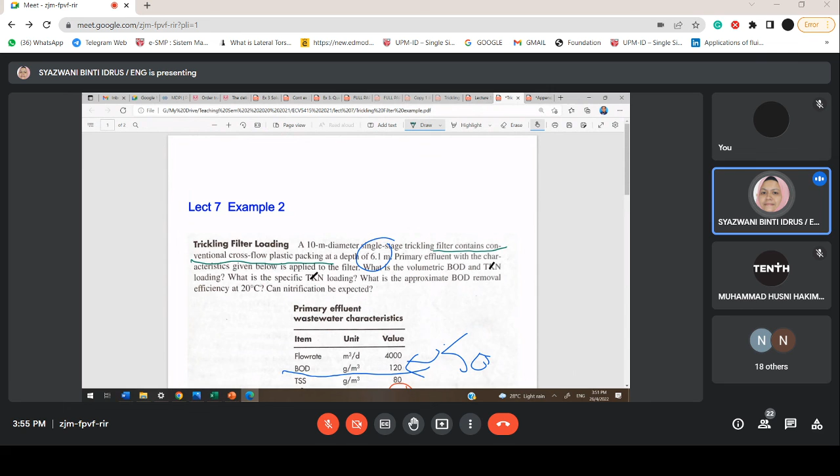These are the keywords that tell us which row we would like to refer to in this figure. So in this case, we are to refer to the plastic conventional row. Why? Because it's mentioned here, plastic packing, conventional cross-flow plastic packing.

So you jangan pergi ambil (don't go take) high specific surface area or random packing, unless sometimes—and this question is easy because the keywords are clearly stated. The keyword is clearly stated in the question. However, in some cases, maybe the keywords are not given.

You are to determine which packing material is to be used based on the characteristic of the wastewater. For example, if the wastewater contains high concentration of metals, high alkaline material, maybe plastic is not suitable. Why? Because they can be affected by corrosion.

So maybe you have to use the river rock, you have to choose the river rock. So these are the justification. Sometimes justification is required for you to decide which packing material to be used.

Okay, so plastic random packing for high specific surface area. In this case, for high specific surface area, the last row, high specific surface area is good if we have very high concentration, if we are to treat high concentration of effluent, because at extreme concentration, high specific surface area is really required so that we can have more microorganism. Okay, let's complete our example here, number 6 just now.

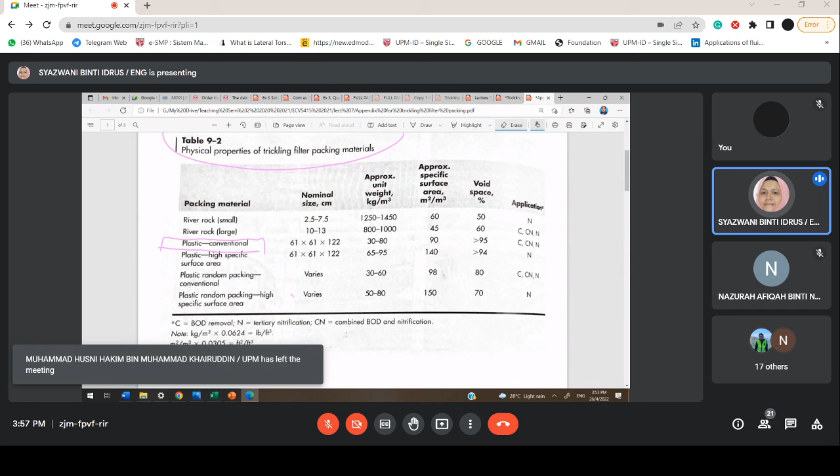The specific surface area of the packing is 90 meter squared per meter cube. Why do we get 90? In this case, since we are to refer to the row of plastic conventional, the approximate specific surface area is 90. This is where they got 90.

Then you substitute into this equation: total surface area equal to surface area per meter cube times volume, so you will get the surface area. This is the specific surface area in the unit of meter squared per meter cube. When you cancel out, this 90 is actually 90 per meter, so that's why you can get meter squared here.

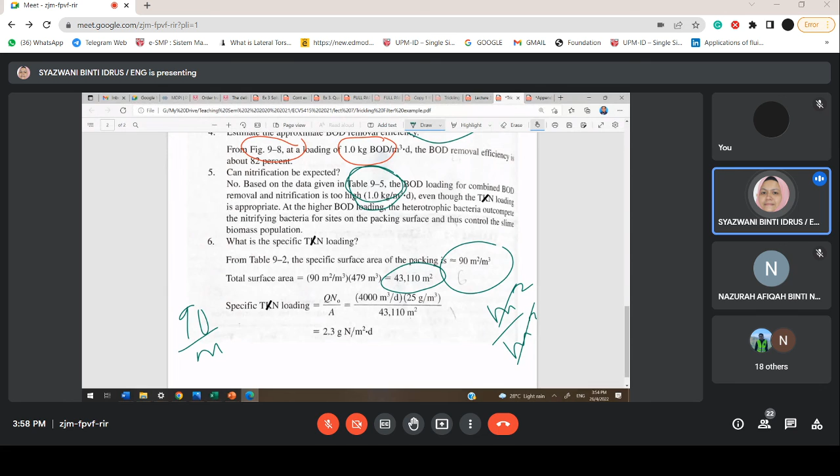So specific TKN equal to Q N-naught over A. Q is given earlier and N-naught is the original concentration of nitrogen in wastewater. A is the calculated area. So you will get the specific loading. That's all, so this is how we can calculate the specific loading.

Depending on the question, it's not necessarily asking you to calculate for the BOD. We can also ask you to calculate for the TSS, or we can ask you to check for the BOD only, for the partial BOD removal during the secondary treatment. So you have to be very careful reading the question, because there must be some keywords available so that you can decide which row to refer to in order to solve the question.

For example, table 9.2 just now, you can see the application. River rock is suitable for high nitrogen concentrations, river rock large is suitable for carbon, carbon and nitrogen, same goes for plastic conventional. But if you are to consider only the nitrogen, only these three are to be used: river rock small, plastic high surface area, and plastic random high surface area. So you have to look at the application so that you can decide which packing material to be used.

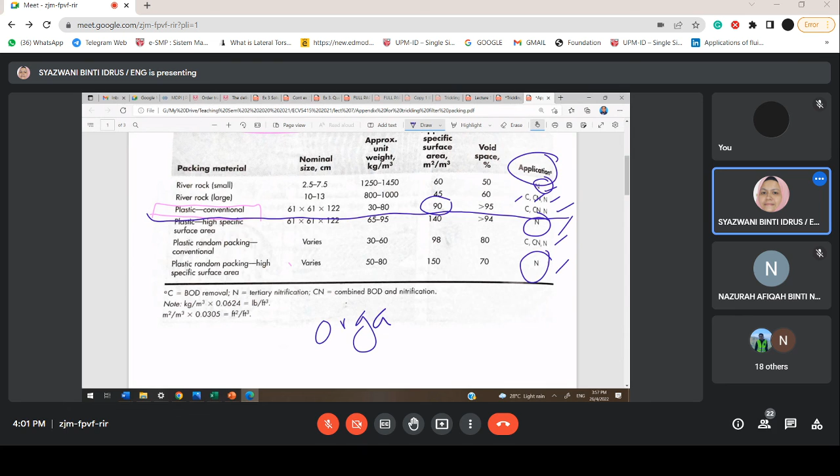If the organic matter is mentioned, then we are referring to carbon. Carbohydrate is also carbon. Organic matter can also exist as carbohydrate, it can also exist as sugar, so all of these substances will contribute to carbon. If we mention protein, then this is equal to nitrogen. However, protein will contribute to the nitrogen.